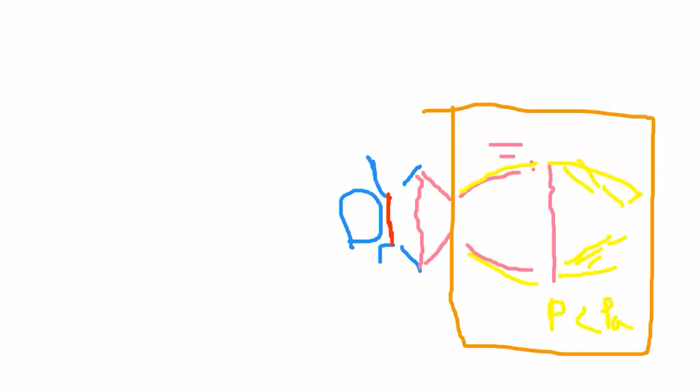And then this pattern repeats when successive cells get created, and in each cell, because of these shocks and other losses, the pressure keeps reducing, which means the strength of the shocks and also the strength of the expansion in each cell progressively reduces, until it gets to a point where the pressure is equal to the ambient pressure. Okay, so that's the flow physics in the shock diamond, and it's very interesting.

And as you can see, it creates some amazing visuals. If you have seen movies like the recently released Top Gun, if you get a chance to watch it again, just see if you can pick these out, because these are very common at the exits of exhausts of supersonic fighter jets. Okay, so that's basically the physics that we want to simulate.

And then I will quickly go into the methodology, how we are going to solve this problem using CFD. Every CFD problem broadly has the same methodology. Identify the fluid domain to capture the necessary physics. So in this case, I'll show you how we have a fluid domain to capture the shock patterns. Then we generate a mesh that captures the regions of high gradients with sufficient resolution.

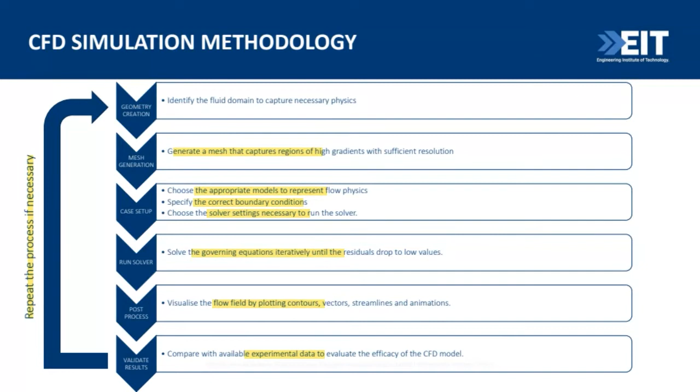Then we solve the governing equations, which are the Navier-Stokes equations, iteratively until the flow field satisfies the governing equations. And then finally, we can visualize the flow field by plotting contours, vectors, streamlines, and animations. If we have any available experimental data, we can compare with it to evaluate how efficient our CFD model is. And depending on what we learn, we can go back and make modifications or refine the mesh, run the solver, and validate the results again. Okay, so that's the broad methodology.

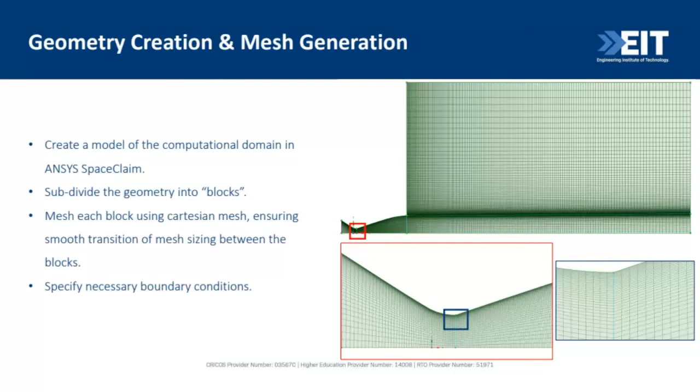Now let's go into how to create the mesh on a geometry. So what I will do now is share my screen, and I have SpaceClaim, which is a geometry generation or cleanup software. So this region is the exit of the nozzle. This region is the nozzle. So this is the subsonic section, which is the converging section.

There is this region, which is the throat, and then this line is the diverging section. Then there is this region, which is the ambient. So this is an axisymmetric problem, which is like a slice of what's happening in reality. Imagine you take a slice through the nozzle, because about the axis of the nozzle, the flow field is largely the same.

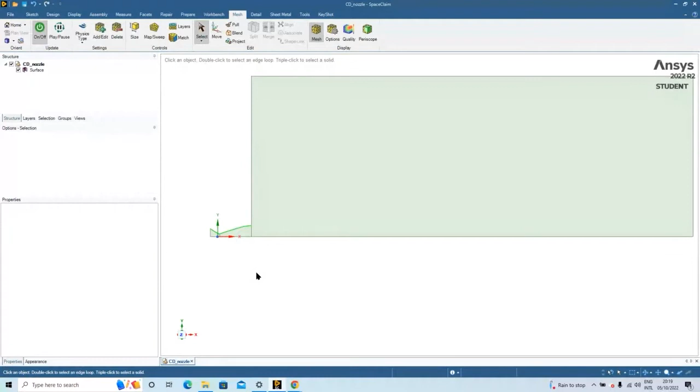So in order to have a more efficient solution, we just take the slice and then simulate the flow on that slice. And what that will allow us to do is capture the gradients in more detail. So this is a common and industry accepted practice where you just do a 2D simulation, a two-dimensional simulation, to capture some relevant flow physics.

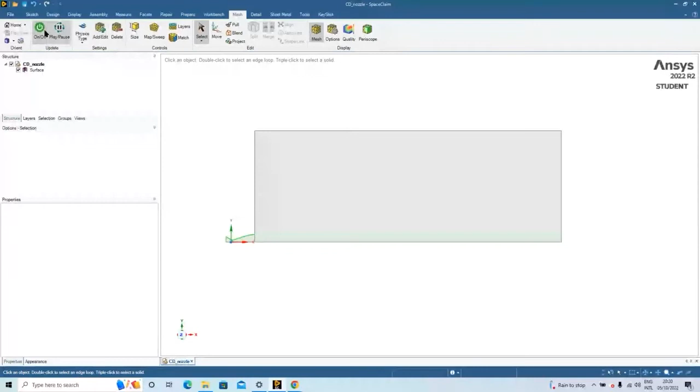Okay, so now that I have this geometry, the next step is to create a mesh on it. So in Spaceclaim, there's a meshing ribbon which you can access through Spaceclaim options. If you go to customize and then ribbon tabs, there's this tick box for mesh, which is not switched on by default, but if you switch that on, you will get this mesh section. Click on or off. Right now it's switched on. If it's off, everything will be gray like this. So click the on button and choose the physics type, which is fluid dynamics.

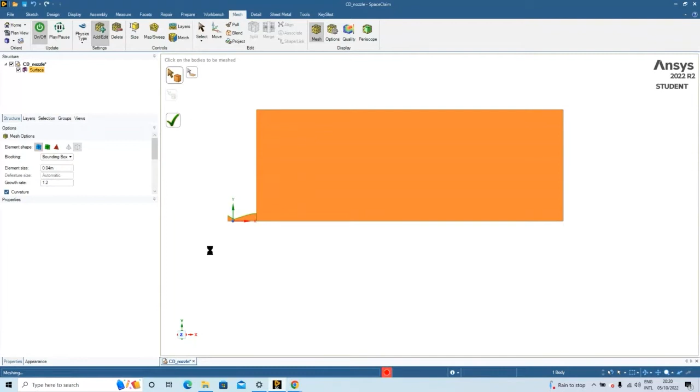And the way this meshing works is it tries to create a structured mesh, like a nice good looking structured mesh on this geometry. So I'll show you how to do that. You just use this bounding box option and click on the green tick. What that does is it tries to break up the geometry into blocks, which you can assign divisions to and then get a structured mesh.

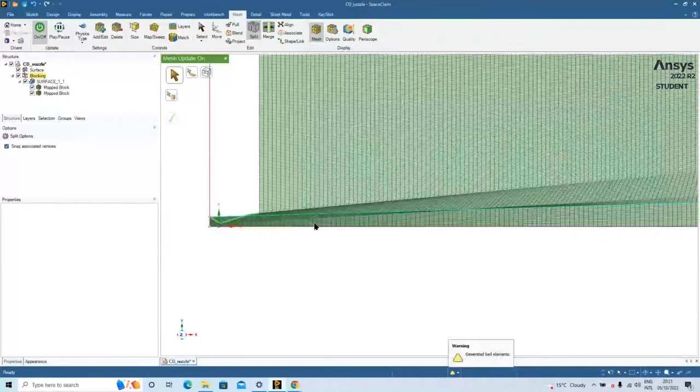And if you see, this mesh is not really good. This divergent section is not respected; it's respected here, but it's not being respected at the important regions, which is the exit. So the way to fix that is to use the tools available to split the domain. So I made a split here, and I'll also make a split here.

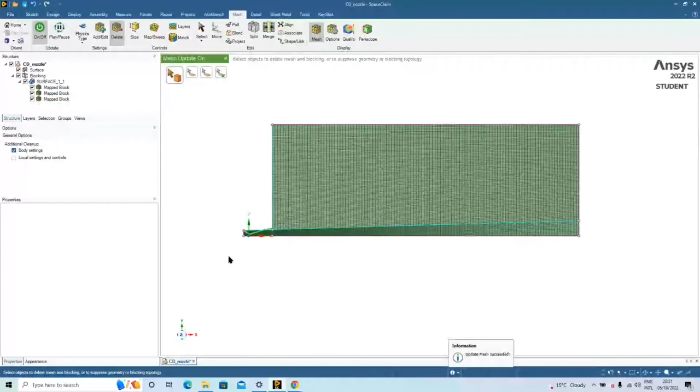So this patch that you can see, I will map the whole nozzle to this patch, and then I'll map the outside ambient fluid to these two patches. I actually don't need this patch, so I use the delete option to get rid of the patch. And then if you see, it has definitely improved a bit.

Now what I will do is split this region again, so that I'll have two sections, where this section I can map to the converging section, and this section I can map to the diverging section. I'll show you how I can do that. There's an option to associate, where you can link the geometry of this block or mesh to the underlying geometry. And then if I click OK, you'll see that it is snapping to the geometry that we have.

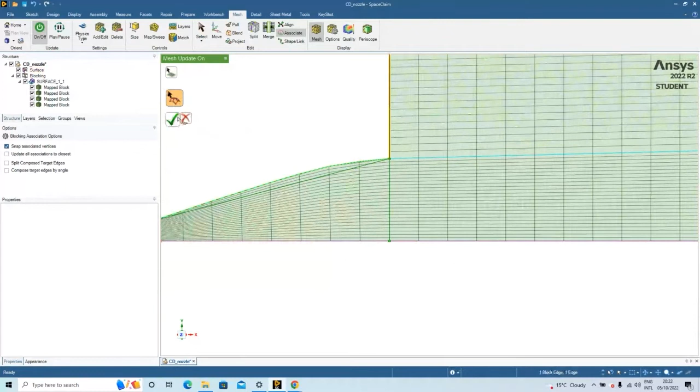So click OK, and you see it is kind of snapped, but it's still not perfect, and we'll see how to improve that. So I'll snap this to this. Sometimes it's a bit tedious, but it's worth the effort. Okay, so I'll snap this to this, and then snap it to this. Okay, so now we are getting somewhere.

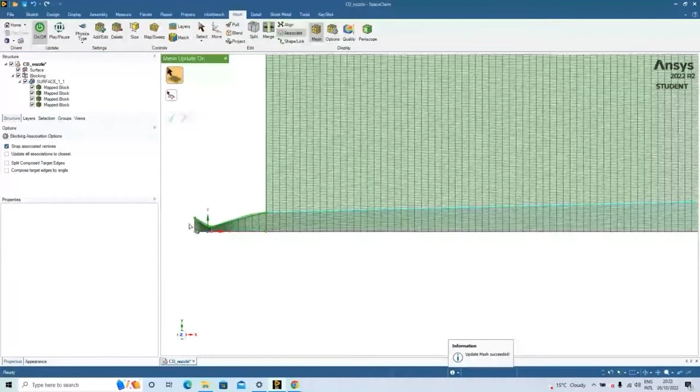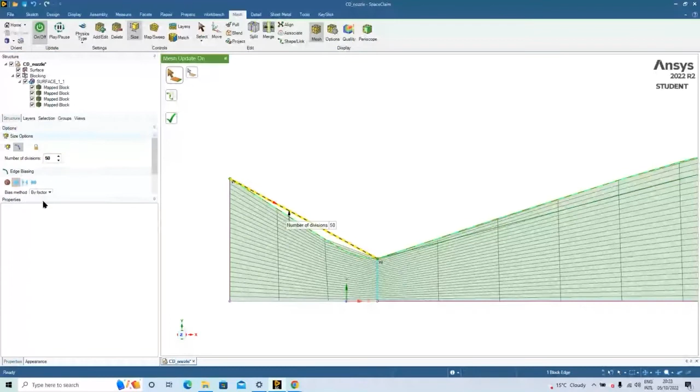Next thing I need to do is give more cells here. You see there are only 3 cells to capture this whole region. We need a lot more than that. So I'll use the size option to select, and then specify 50 instead of 3. And then I want clustering about the center, which is where the flow will become sonic. Okay, so that's with 50 divisions. You see now it's respecting this a lot better.

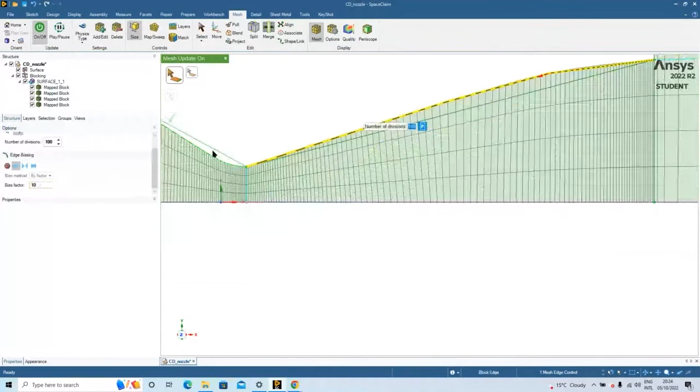So I'll select this, and again, this lock indicates hard behavior, which means that constraint will be respected no matter what. Here, because it's longer, I will use 100, and I will use this case where I have a fine mesh over here and also a fine mesh at this exit. And then maybe I'll increase the factor to be about 10, and then have it like this.

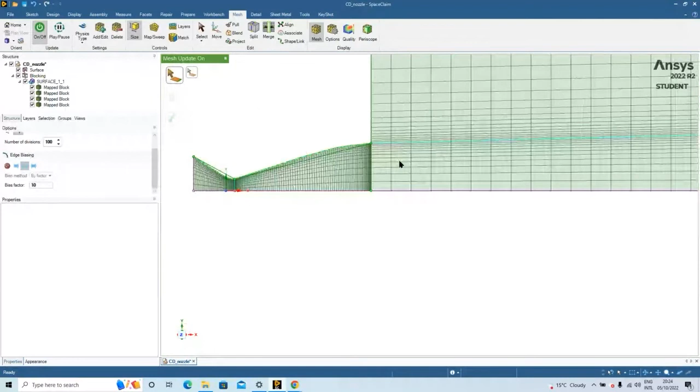If I just have it as 10, and then click on the green tick, what that will do is it will make sure that the mesh here is the same. So we don't want sudden jumps in the mesh for us to get a good quality answer. So next step is for these.

So again I will have, say, 200, but this time I just want a fine mesh here. I don't really want a fine mesh here. So I will use 50 and copy to parallel edges.

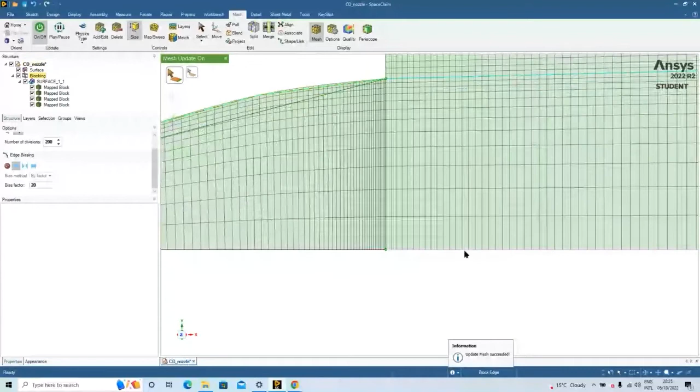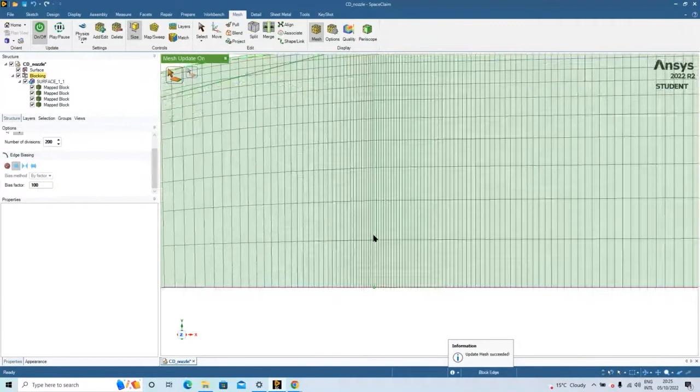Okay, so if you see here, 20 is a bit too low. Make this 50 like I thought initially. Yeah, so that is a bit on the lower side. Let's just go to 100. I think this is a bit better. So that's 100. And what we will do is, we'll also refine this mesh, this region.

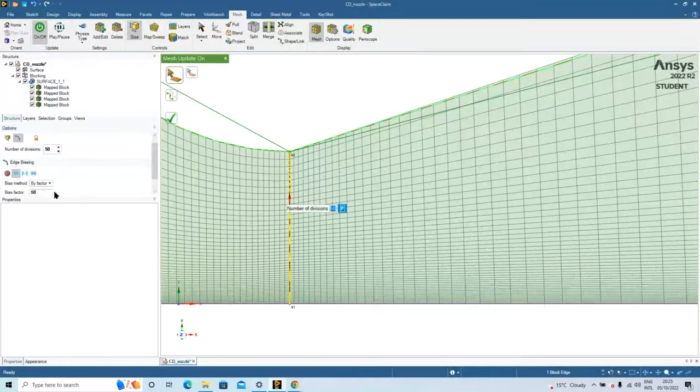So I will use again 50 cells here, and I want to have more mesh along the walls. So make this about 10. I want it the other way. So if I click, make this 50 as well. That will allow us to get a very fine mesh over here. So you see this dark region indicates there's a fine mesh there, and wherever it's dark, it indicates mesh refinement.

So now my final section is to refine this region. Again, I will put 100 divisions and then give it a bias of say 50. I think I need a lot more than 50, maybe 500. So maybe I need a bit more. Maybe 1,000 would be better.

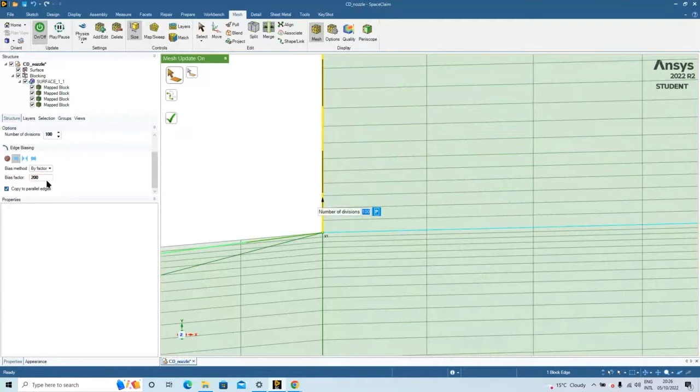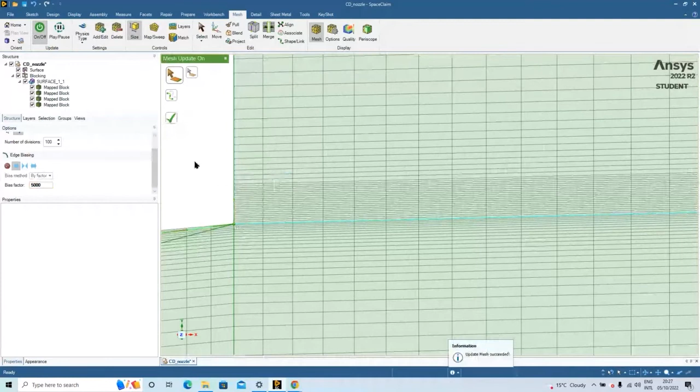Okay. So let me, I think, make it 2,000. No, 5,000. Yeah, sometimes you'll have to just modify these until you get to the required value. Yeah, that's a bit more like it. So okay, so that's our mesh, and yeah, I'm happy with this mesh. The other thing to remember to do is just make sure you save this.

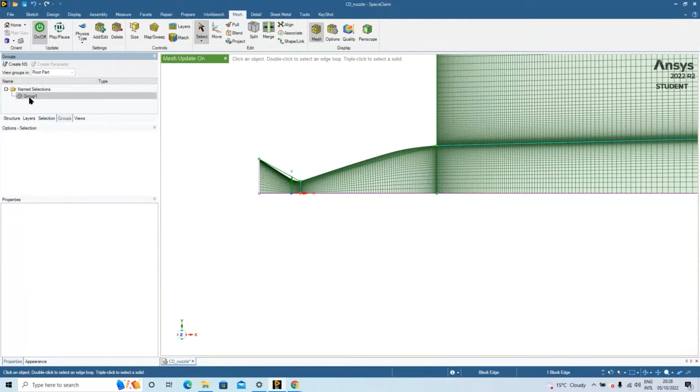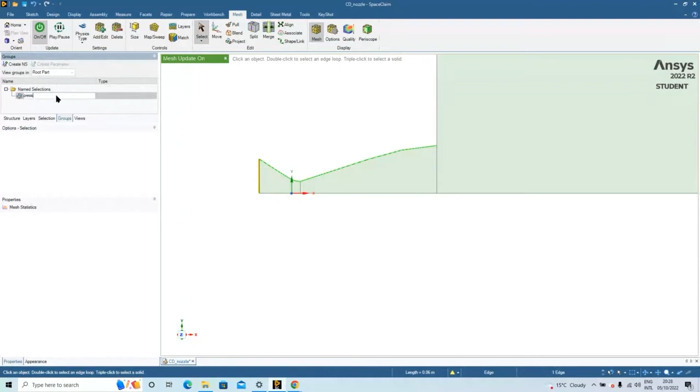So I've just saved this problem, and I also need to tell the software what is my inlet, what is my exit. So for that, what I will do is I'll hide the underlying geometry and then go to groups, select this inlet, and then click on create named selection and call this press-in. Okay, so that's my inlet, and then this is my outlet.

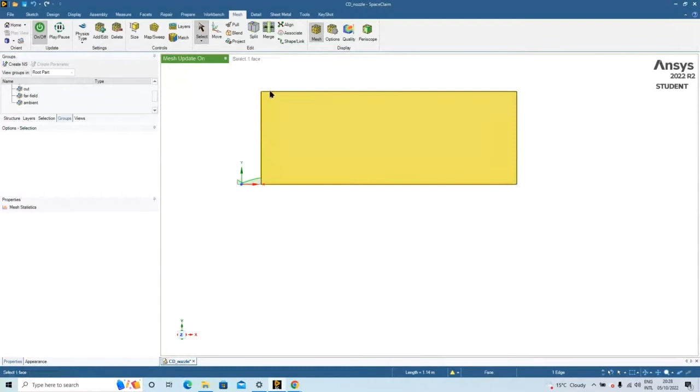So just OUT. This is my far field, and then this is my ambient. So there'll be some air coming in. So that's my ambient, and then this would be my axis. So this would be my axis. So I'll just call it AX. So I have my pressure inlet, outlet, far field, ambient, and then axis, and then this is my nozzle wall.

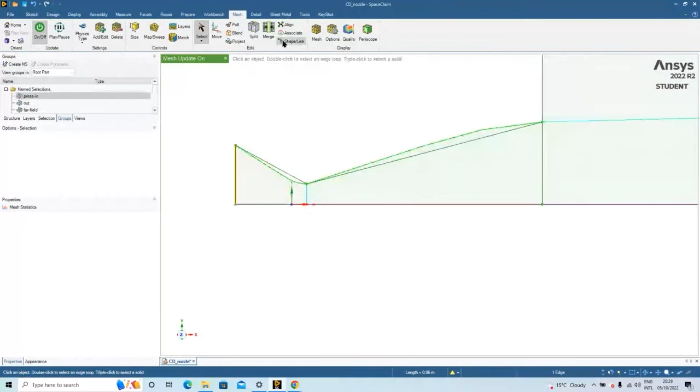Control G. So that's my wall, and what I will do is, there's an option to switch off the mesh and then do the association. I've done the association throughout. Okay, so let's save this and let's try to generate the mesh or set up the problem.

So if you go to this workbench tab, there's an option to send this to the solver. So click on that mesh to solver, and what that will do is it will launch Fluent in the background. And then I will just try to hit select, and then that should allow me to run. Okay, so sometimes it will give you an error saying number of users are exceeded.

So let's just go back, and I can open it from the start menu, and it should have the path remembered. So this is the one I just saved. So let me just start with the selected options.

So let me see if there are any questions. Okay, I don't think there are any questions so far.

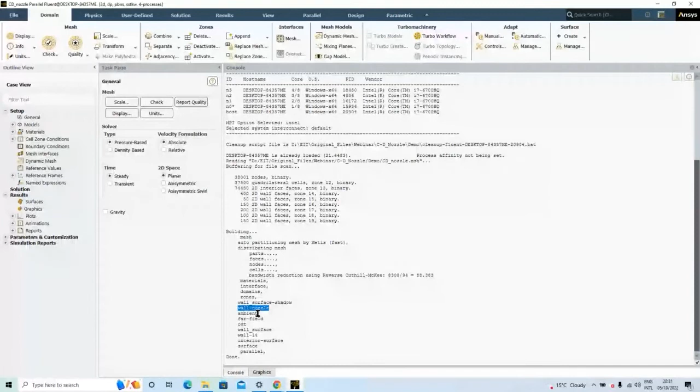So right now, this is the console where it's reading in the faces and it's reading the mesh. So I have my wall, nozzle, ambient, far field, all those have come through. And if I click on this boundary condition, I need to just specify what these are. Right now, it thinks everything is a wall. So if I click display, there's this white region.

So this will be a pressure inlet, with gauge pressure of 1 atmosphere, or maybe it's in high altitude, so make it 0.1 atmosphere. Go to units and then go to pressure and set this to be 1 atmosphere and units of atmosphere. So make this 0.1 atmosphere, which is 1/10. Click apply.

Then I have my far field, which I can just call it to be a wall, but assume that there is no resistance. So there's an option to just specify there's no shear at that location. Then outlet is a pressure outlet, so just do pressure outlet. And then this also has the same ambient pressure of 0.1 atmosphere. So the far field is done.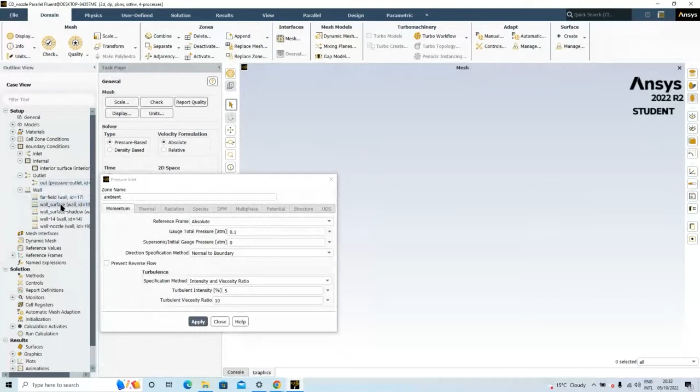Surface, so this wall surface is actually the bit between the fluid, the two sections of the fluid. So that should be an interior. Interior is internal, so there's no obstruction to the flow. So the ambient is done. So let's draw this. Okay, that's our mesh, you can see.

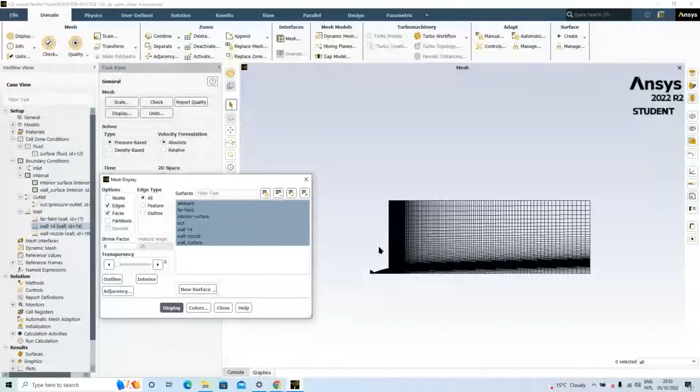So if I want, I can hide this interior and then look at this wall 14, it should be okay. So for some reason the axis is connected. Okay, fine. We can quickly do that. Sometimes I have to deal with such kind of issues. So I'll just separate this, click separate. So if I go to display again, that's my axis, this wall 14. I'll just edit that, call that an axis. Apply, and then change this to be an axis.

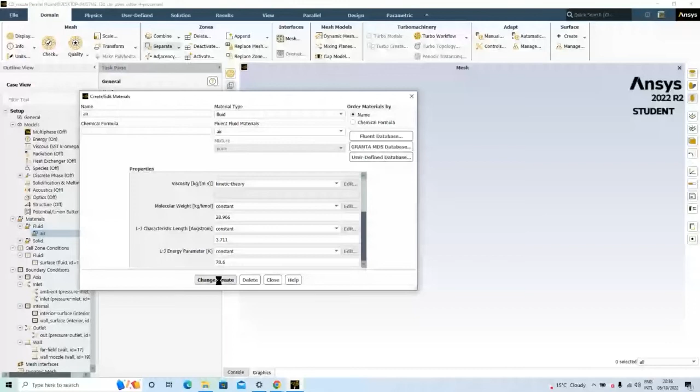These are the information that you need to provide to explain to the solver how the material behaves. So for thermal conductivity, I'll use kinetic theory. For viscosity, I'll use Sutherland's law. I'll just use the defaults, or I can use kinetic. I think I'll use kinetic theory, and other things I'll leave as the default values.

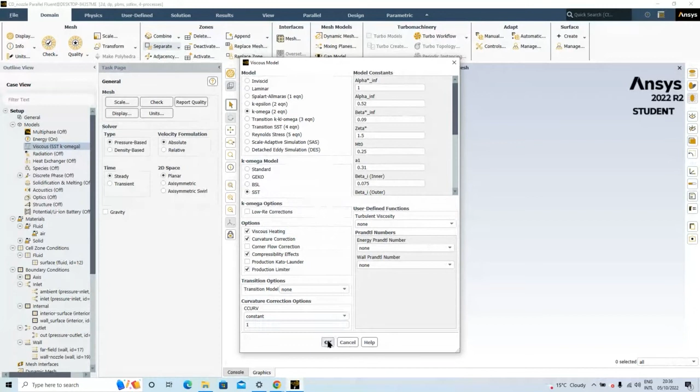And then we need to check what model we are using to capture turbulence. The industry standard is to use SST k-omega model, but I'll switch on viscous heating, curvature correction, and compressibility effects, because those will give you a better capture of what's happening at high speed flows, which is our case. So just say okay to that.

Now, also this problem is axisymmetric, so I need to use the correct axisymmetric formulation, and I'll use the density based solver, which is good for high speed flows, supersonic flows. These warnings were when I created this axis, saying change to axisymmetric problem, otherwise you'll get errors. So that's fine. Also do a mesh check to check everything is fine. Looks like everything is okay.

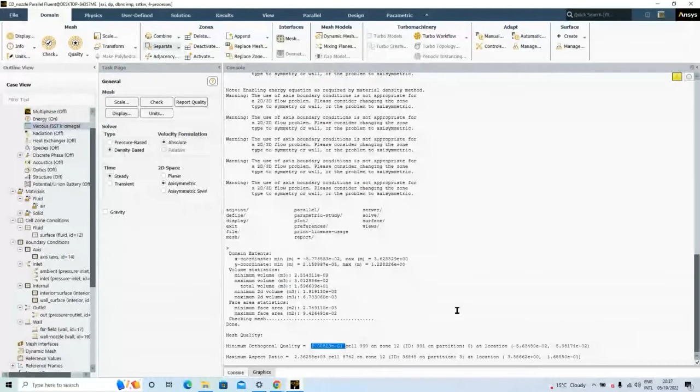Look at the quality. It should be more than 0.1. I have the orthogonal quality as 0.8, which is also very good. Now I think I'm good to run this. Before I do that, I need to track some information. So for example, I can look at the force, this is to evaluate the convergence of the simulation.

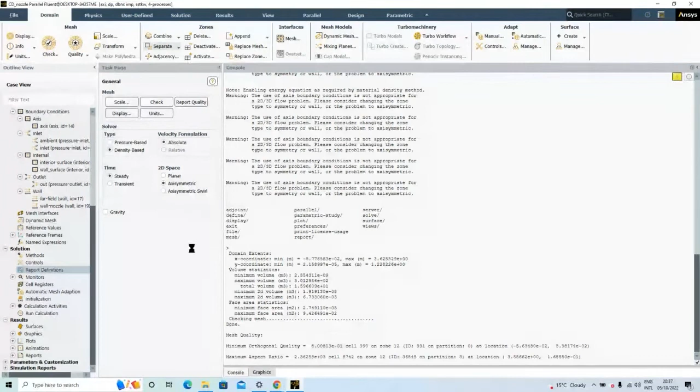So in the force report, I can look at the force moment. The x-axis is along the horizontal and y-axis is along the vertical. So when the flow is accelerating, there'll be a reaction force on the walls of the nozzle in the negative x direction, and that will be the thrust produced. So call this nozzle thrust, and then select the wall nozzle, and then it will be either plus x or minus x.

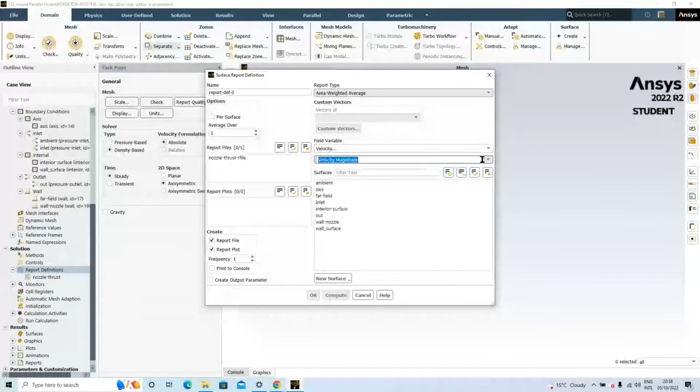So let's put it around the minus x axis, and there's an option to write it out as a file. Okay, so there's also an option to create like an area weighted average of, say, Mach number. So go to area weighted average of velocity, and inside velocity you'll have Mach number, and that will be at the wall surface. So if I draw the wall surface, that's exactly the exit of the nozzle, if you saw.

So at that exit, I want to look at what is the area weighted average Mach number. If that becomes flat, that gives me additional confirmation that the simulation is converged. So area weighted exit Mach number. I can name it like that so that I know what I'm plotting next time. Similarly, I can look at area weighted temperature, pressure, and all that at that exit. But for now, we can use these two.

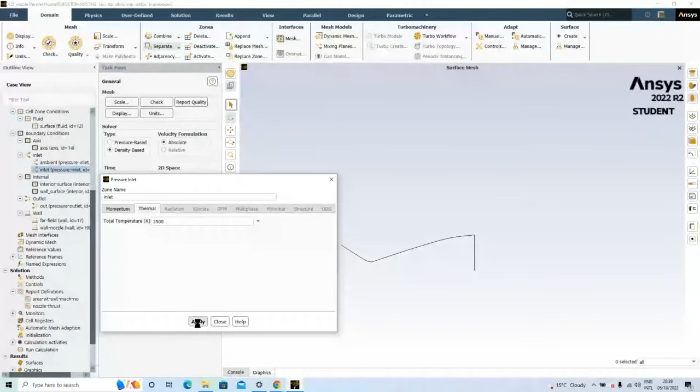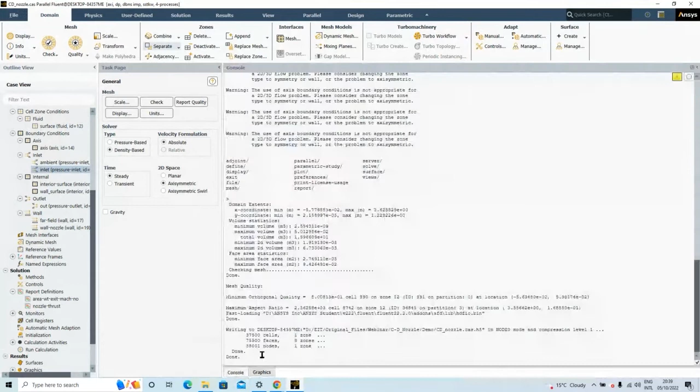Another key thing to remember is usually the flow at the exit of the nozzles is very hot. So I'll have to specify it's not 300 Kelvin, it's close to 2500 Kelvin. So I'll click apply, and then close, and I think I have everything set. I'll just write the case file. So nozzle.cas.h5, and it's finished writing in less than a second.

And now I will right click to initialize, and what that will do is it will create an initial starting point for the solution. So let's look at, for example, contours of pressure. This is static pressure contours in atmosphere. So there's 5 atmosphere here, and then there's close to 0.1 atmosphere here.

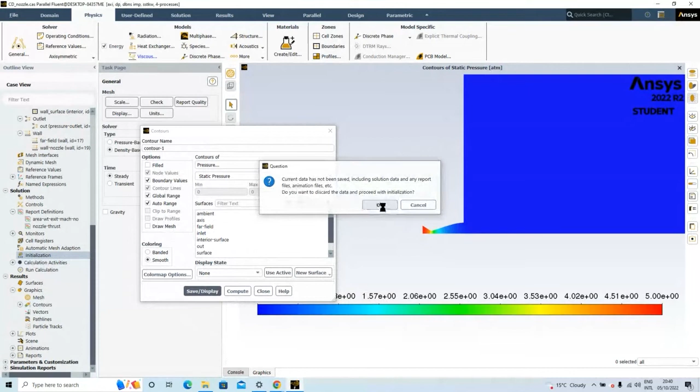That brings me to another point where usually the operating conditions assume the ambient operating pressure is 1 atmosphere. I'll make that 0 and reinitialize. And then I can call this contour pressure, click save display and switch on fill. That is my pressure contour.

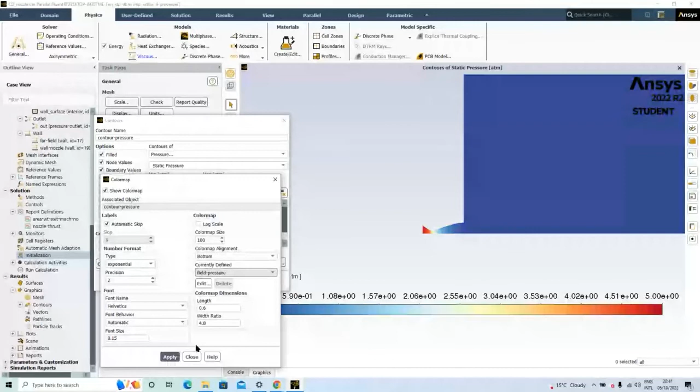There's an option to change the coloring in color map options, to use what is called field pressure. So that gives us a slightly different color scheme. Here the idea is red and blue indicate regions of high pressure and low pressure, and the one close to white indicates a midway between the two. So that's my pressure contour.

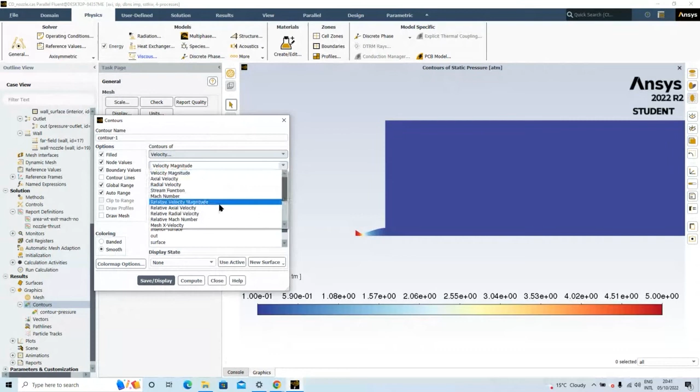So I'll just look at velocity and then Mach number contour, and call this contour Mach number. Again, I'll choose the color map to be field velocity and then click save display. So that's my velocity field. It's showing a Mach number of 0.5. There's another option to have the color map at the top so that it is not using up all your space. Apply, close, save display.

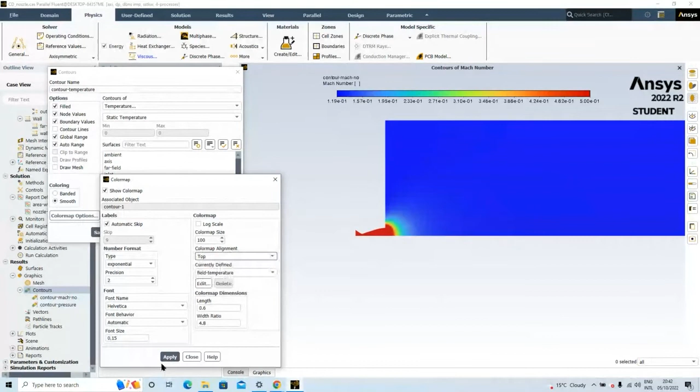Then I'll just do one more for temperature. So go to temperature, static temperature, call this temperature, then go to color map options, field temperature, and make this go to the top, apply. So that's my temperature. Right now, everything is at a low value. So save this again. This time I can write out the data file, where I just overwrite the previous one.

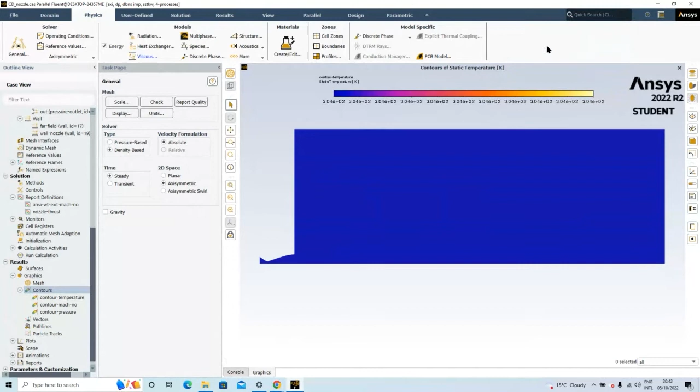Now this is a reasonable starting point, but for high speed flow, there's a way to improve our result. You have to go to the search bar here and type FMG, and that will solve the Euler equations in this domain, and you will see how this flow field will change when it solves. Okay, fine. I think it gave me an error here. Looks like it doesn't like one of our boundary conditions.

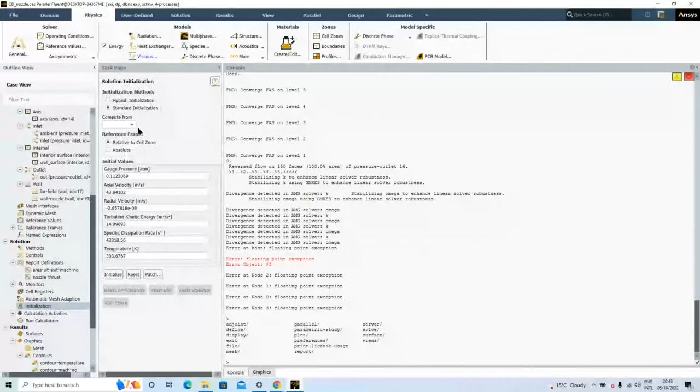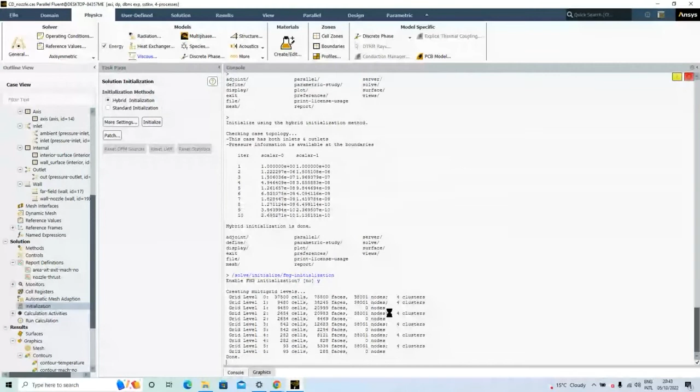So maybe I'll make this 2, apply. I'll just initialize this again. Okay, yeah, I'll just initialize with hybrid and then use the FMG initialization and see the flow. Okay, so sometimes you get these kinds of errors, and that's where we have to diagnose what went wrong. Looks like the pressure is too high somewhere.

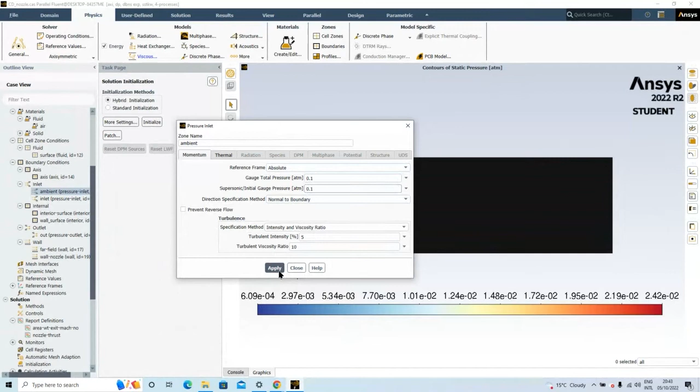So let's go to ambient pressure. So that's total 0.1. Thermal is 300, that's fine. And then the outlet gauge pressure is 0.1 and 300 is the thermal. So let's just look at initializing. Okay. Let me just run it with these settings and see what happens.

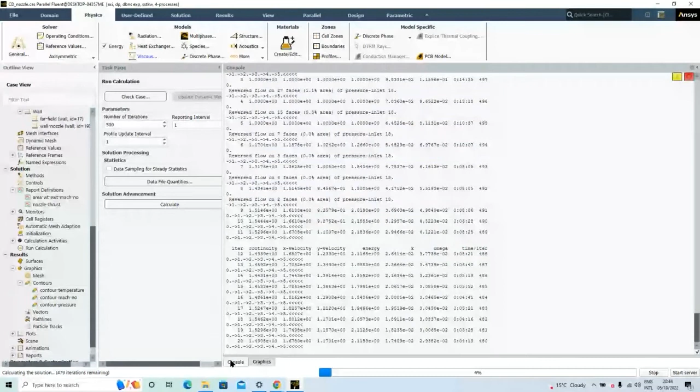Okay, these residuals are behaving reasonably well. So this is the thrust generated by the nozzle. So it's about 12 kilonewtons. And then if you look at the exit Mach number, it's going up, whereas here it's tending to. So there's a big oscillation, but looks like the oscillation is coming down. Even these residuals are dropping.

So the residuals dropping indicates that the flow is getting to a point where the governing equations are solved. So when you are at the high values of residuals, the governing equations are not respected by the flow field, whereas here they are getting closer. And if you see here, the nozzle thrust has effectively flatlined and we'll see that the exit Mach number will also flatline. Okay.

So I have a very fine mesh, that's why it's taking a little while. But you see that the thrust is more or less flatline, whereas this exit Mach number is still evolving. So we just need to have a bit of patience and just wait for this to converge. So let's look at the residuals. So usually this is what we do when we are running the CFD simulations. We just keep an eye on residuals or the other quantities of interest.

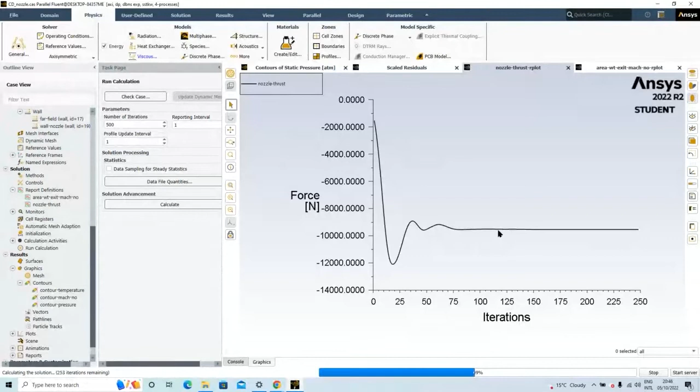So if you see the thrust, it has settled somewhere at about 9,500 newtons. So just below the 10,000 value. And then if you look at the area weighted exit Mach number, again you can see that it's beginning to flatline. That's at just over a Mach number of 3.5. So see that most of the residuals have become flat.

So continuity is a measure of the difference between whatever flow is coming into the system and whatever flow is going out. So if it's a small value, it means that the flow in is close to the flow going out. Then we have the momentum equations x, y. So that is keeping track of how much momentum is entering the system and what is the momentum of flow leaving the system. Then we have the energy equation, which balances out the energy, and k and omega are the turbulent quantities. So we need to account for turbulence in high speed flow.

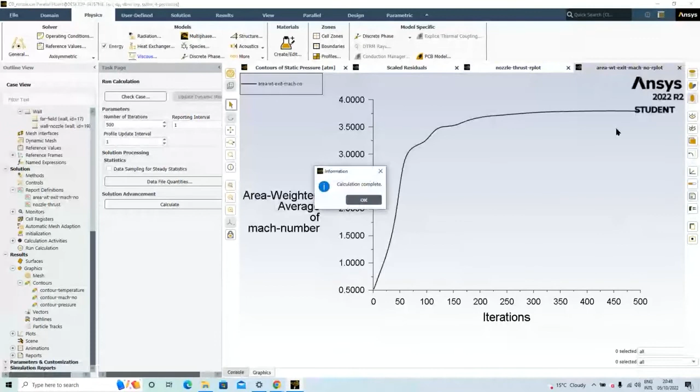So you can see that it's almost flat now. So let me run it till all the 500 iterations are done, and then we can look at how the results have changed. So it is slowly coming down. We just need to have a bit more patience and then run this for a bit longer. But for intents and purposes of this demonstration, we can assume that the solution is converged.

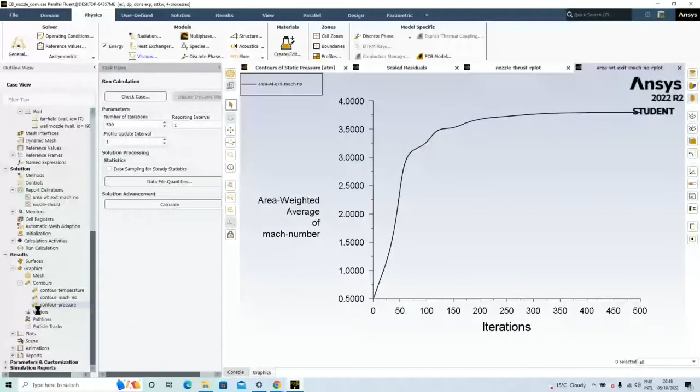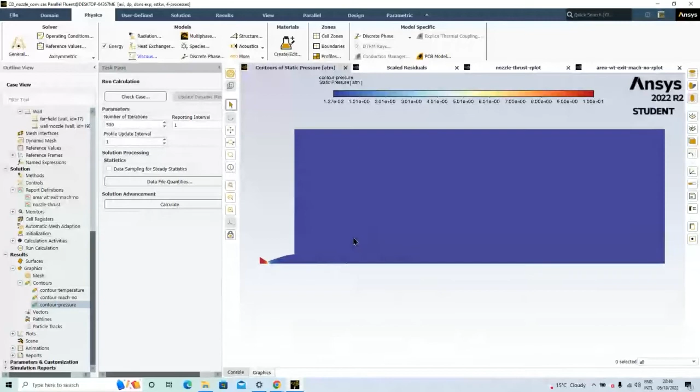So I'll write the case and data file with preferably another name. So call this conv for converged, and say OK. And then let's look at how the static pressure has changed. If I click display for the static pressure, and then let's also take this to the top, apply. So we don't see a big change in the static pressure contour plot, but let's look at the Mach number contour.

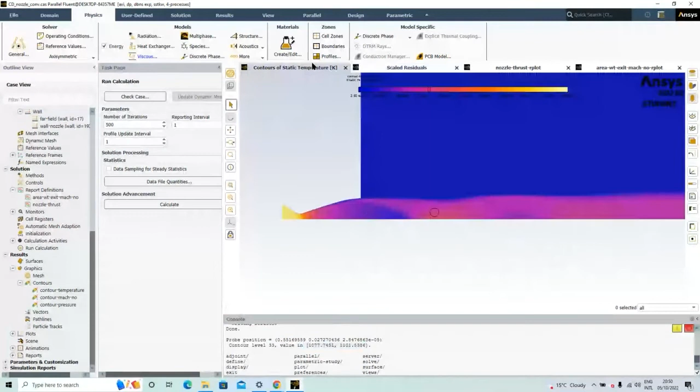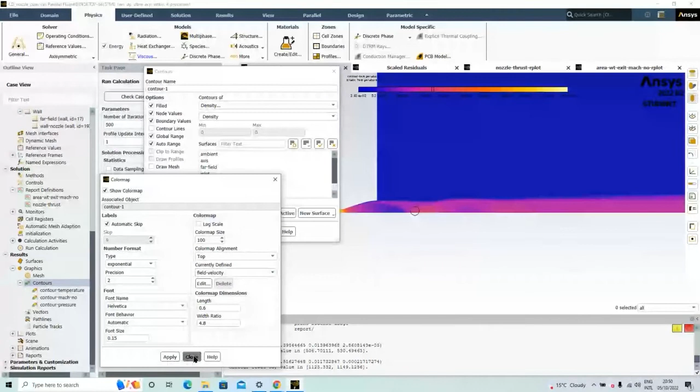So if we go back to temperature and then click here, you'll see that the value is about 500. So from here to here, it has gone up by about 600 Kelvin, which is effectively double. Okay, so that's our temperature. Let's just do density as well. So density, and then make this top, and then let's just use field velocity. So that's the density variation. Again, we see this dark blue, which indicates low density gas. Okay, call this contour density.

So for all these, you can see that some of these are not seen well. Even here for the Mach number contour, we see that it's a bit fuzzy. It's not well defined. So I'll just show you another way of tracking where the shock's happening, and that's in the derivatives and the strain rate derivatives.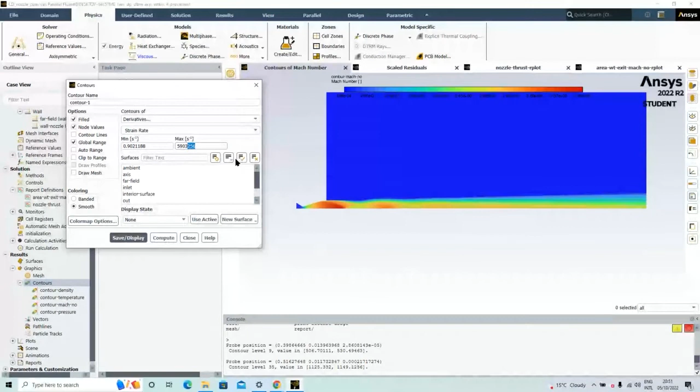So if I click on compute global range, sorry, compute, and then what I will do is I'll remove a couple of zeros from here and click save display, and again I'll take this color map to the top, and I will use flame as the, so if you see here, now you can start seeing some patterns.

So this region which I'm highlighting is the shock, and then this is a shear layer. On top is the low speed flow, and in the middle there's the high speed flow, and there's a lot of gradient between these two streams. And again, this black region is a region where you have high strain rate.

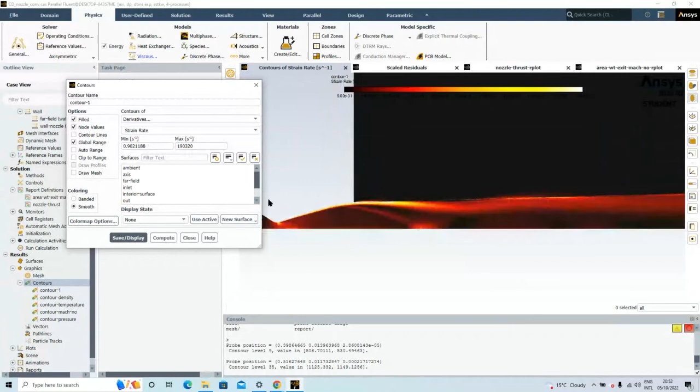So maybe let me just add a zero and display, no, maybe make this 1. Okay, so that's how you can see the shock. Okay, so let's save this again. But I'll show you a nice trick to refine the shock capture further.

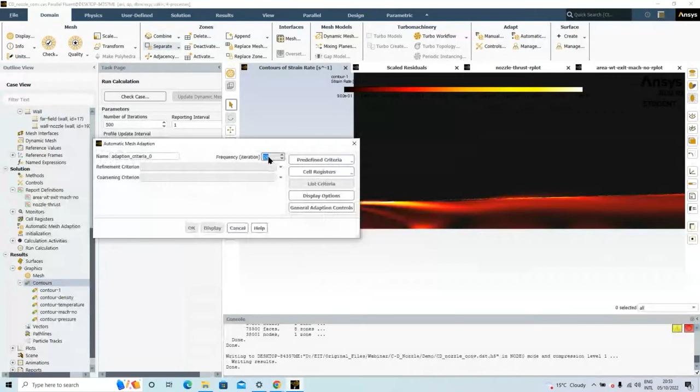What we can do in the software is you can automatically change the mesh where you have regions of high gradients. So go to aerodynamics, shock indicator, and density based. What this will do is look at where the density gradients are high and identify those as shock gradients, and then put more cells there.

Okay, so if I click display, these are the regions where the mesh will be refined. So you see these, these are the regions where the mesh will be refined. So I'll say okay. Okay, fine, close. It already has. And then what I will do is I will run this for another 100 iterations

and hit calculate. What will happen is it will run about 20 iterations as usual, but then when the 20 iterations complete, it should refine the mesh in the regions that it has highlighted here. So it was just waiting for something to clear. And yeah, it's starting to run the simulation again.

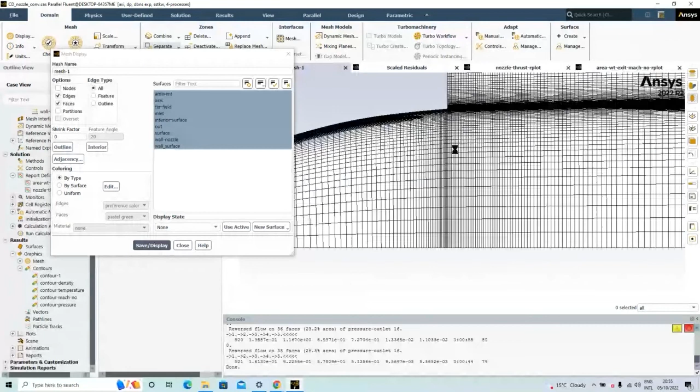So the residuals will continue from where they left off, but when it hits that 20 mark, you'll see that there's a big jump. And that big jump happened because if I show the mesh, you will see that wherever you have regions of high gradients, you see a mesh refinement like this. So there's a mesh refinement here, there'll be another mesh refinement here, and then click calculate.

And what that will do is cause a jump in the residuals, but then they should start dropping. The nozzle thrust and this exit Mach number should not significantly change. So the nozzle thrust has not changed significantly, and this has not changed significantly. Sometimes if it doesn't show up, if you just close that, it will show it again.

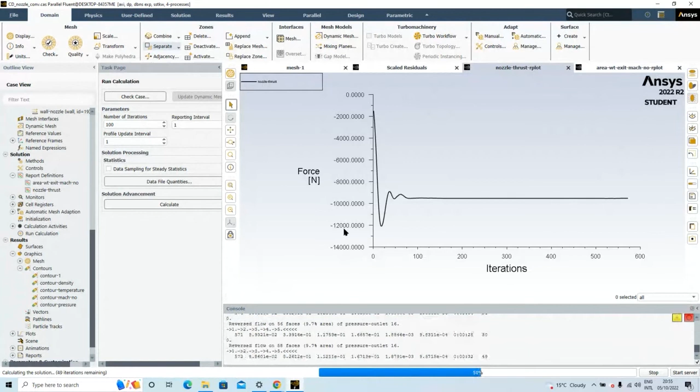So let me run this 100 and then see how the residuals look. You can see that the jumps are progressively getting smaller, which indicates that the shock is being resolved well. So the thrust has not changed. The exit Mach number plot, let's close it and open it again. Okay,

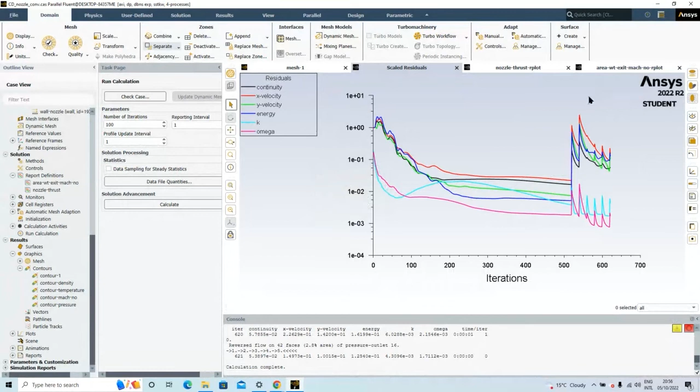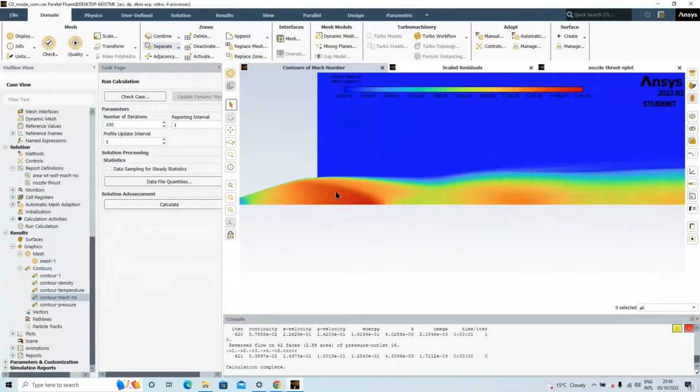so let's just close it, and then if we draw the mesh again, you'll see that it has refined these regions a bit more. And let's look at the Mach number contour now. You see that there's a bit more definition that has occurred in these regions.

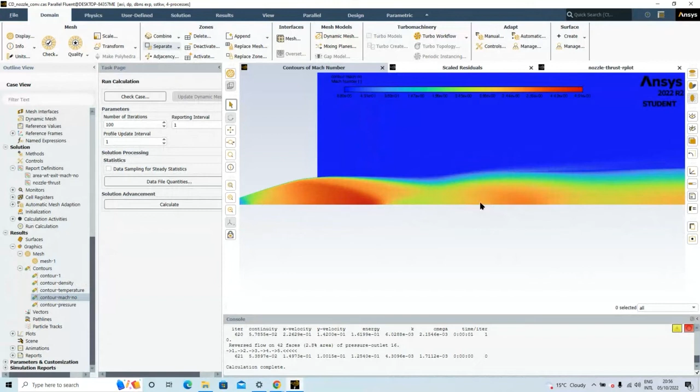And then if you look at the strain rate also, you'll see that there's a bit more definition that has occurred. You can do this successively to get a very high definition contour for these kinds of problems. So I think with that, I'll save this case and data file

and then stop sharing my screen and go back to the slides. I think Molefi, if you can share your screen with the slides, or maybe I'll just share the files. Essentially, whatever I've shown in the subsequent slides is what I've demoed in the tutorial. So these are how I've done successive iterations.

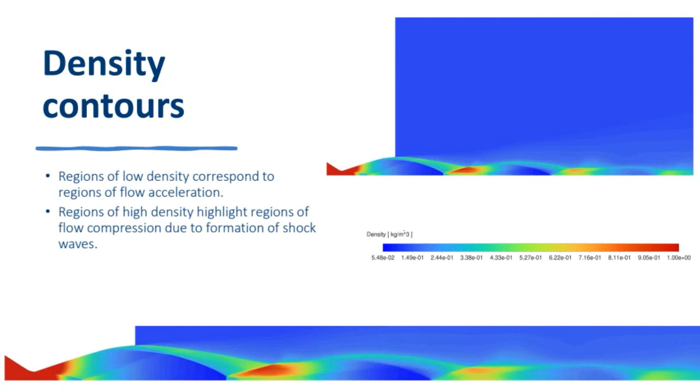So that's why we see all these jumps for the mesh refinement. And this is the force where you see that it's effectively a flat line. And then these are how the density contours look. In this case, I used a lower temperature inlet gas. If I reduce the inlet temperature to about 300 Kelvin, you'll see these kinds of flow patterns.

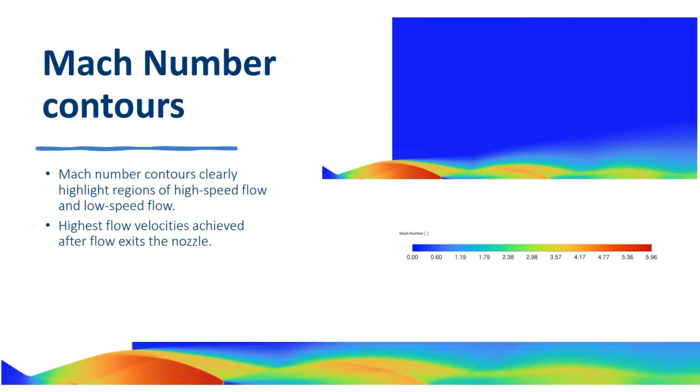And then these are the Mach number contours where you can see successive iterations have improved the resolution with which we capture these shock diamonds.

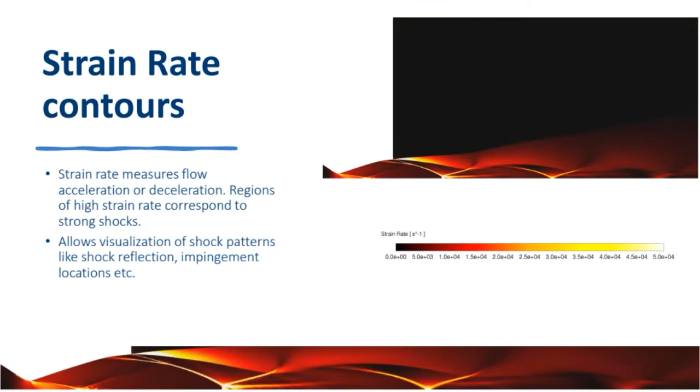So the flow in the nozzle initially has a very high total pressure, but as soon as it encounters the shock, the total pressure gets destroyed, and that indicates the capacity of the flow to do work has greatly diminished.

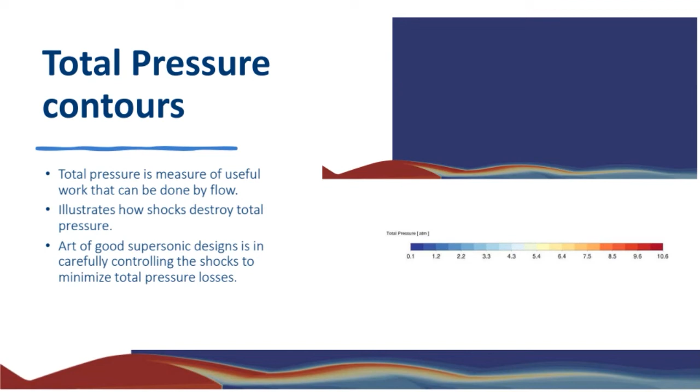So just to summarize, I've provided a brief introduction of how to conduct analysis of supersonic nozzle exhaust pattern through CFD. We've looked at an example of how to do that. We looked at how to generate a mesh, how to set up the problem in CFD, and troubleshoot a few issues that might arise, and then conduct a CFD simulation and look at the results.

And the way you can use this information to improve design is when you post-process the results, you can identify regions where the flow is not expanding. So you can change the shape of the diverging section of the nozzle to see if you can achieve more thrust. So

there's a theoretical procedure for that using method of characteristics. I'll not go into that a lot, but that is used a lot in coming up with the designs for rocket nozzles. So all these rockets that carry satellites into the atmosphere, they are developed using what is called as method of characteristics. So you can use that, and CFD, to further refine your design.

And the other key selling point for this simulation based methodology is that it's more cost effective than conducting experimental analysis. So you saw over 1 hour we could get an idea of how to solve this problem on a computer and get answers which are close to experiment.